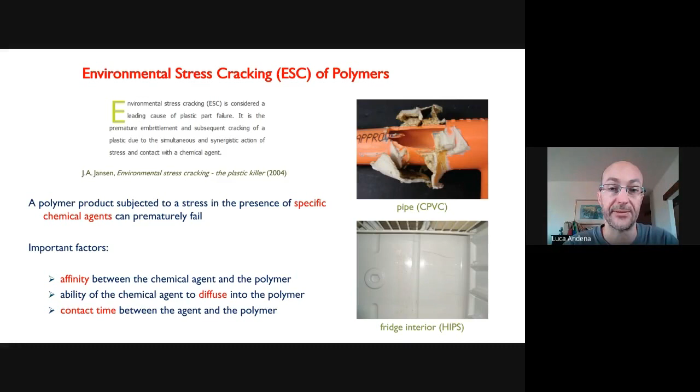The generally accepted mechanism to explain ESC is related to the typical way we conceive failures in polymers. Do you see the pointer, Bamba? Well, I don't know, hope so. Anyway... okay, that's good, so I can use it to point out things.

Typically, when we observe failure in polymeric materials, we observe the formation of a craze, which is the structure generating from an already present defect within the material. The craze starts to grow with the formation of some voids with this fibrillar structure in which the material is drawn from the bulk and the fibers are stretched unto the point in which they break.

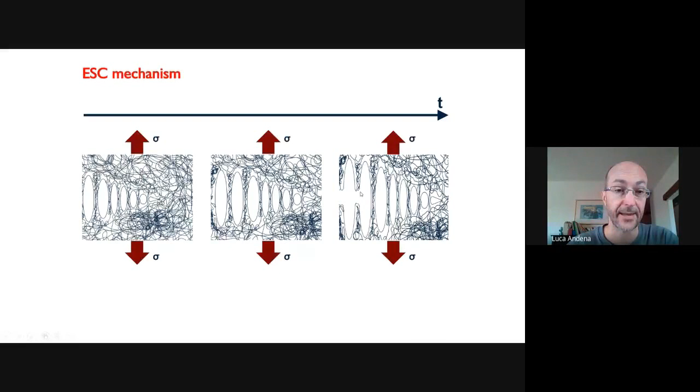In presence of the active environment, the environment can diffuse within the craze and locally cause a plasticization of the macromolecules of the material. This plasticization, which occurs because of the affinity between the agent and the material, basically makes it much easier for the fibers to deform and eventually break, thus reducing the mechanical strength of the material.

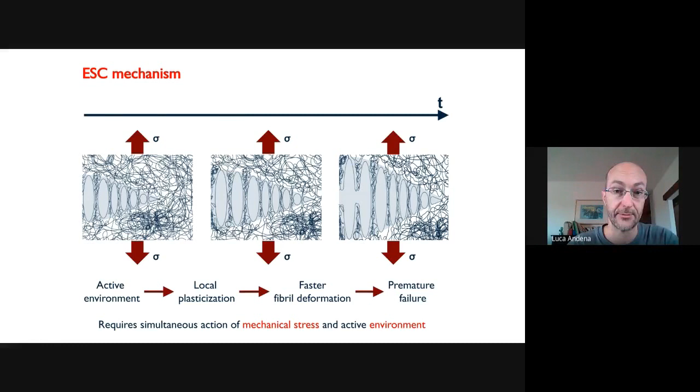The phenomenon has been studied extensively in the past 60 years, I'd say, or something like that. And the way it's described within the scientific community typically is related to a fracture mechanics approach, which is taken from the description of slow crack growth phenomena in general.

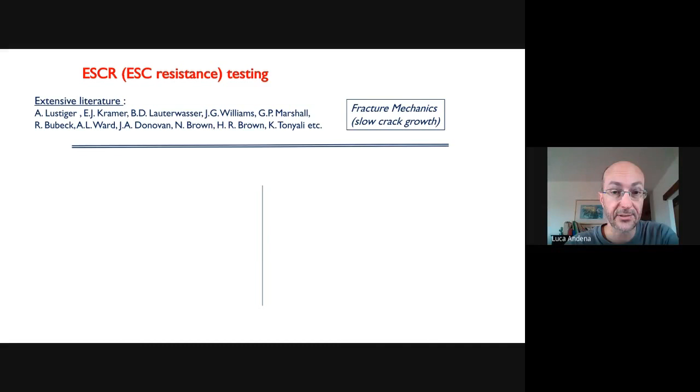However, before going into fracture mechanics, I'd like to discuss with you a couple of tests which are generally accepted as industrial standards to describe the phenomenon of ESC and to evaluate the resistance of materials to this kind of fracture. The first one is the bent strip method, which is generally used for rigid materials like amorphous polymers, like polystyrene seen before. The idea here is that I take a tensile sample and put it on a template with an applied deformation, and then it's immersed within the medium.

So you have the simultaneous presence of the mechanical stress due to bending and the environment, and then you test the sample and compare the strain of break with the value of the strain of break that you obtain on a sample which has not been immersed. Of course, the reduction in the strain of break will tell you how much the material is sensitive to ESC.

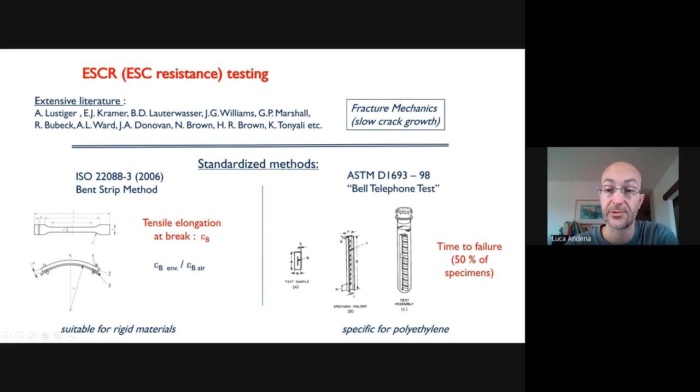Another method is the generally accepted gold standard for polyethylene and polyolefins in general. It was developed in the 1950s by Bell Labs, and the idea is, well, they were working on cable insulations. The idea is to cut small samples, put a notch in a sample, then bend it, put a stack of these samples in a vial containing the liquid, and then record the time required to obtain failure in 50% of the specimens.

There are a few issues with this kind of test. As you may notice, none of them is a proper fracture mechanics test. In the bent strip method, you don't have a notch, so the defect which originates fracture is not known a priori, it depends on the defects left there by the production process.

In the Bell telephone test, you have a notch, but the notch is put in the wrong way when you compare it with the existing bending stresses, which would be parallel to the notch direction. So the notch will cause the initiation of fracture, but then the fracture will proceed driven by stresses which are not the bending stresses and would change direction. In addition to that, the test is very geometry dependent, meaning that the bending stress that you achieve initially depends on the thickness of the samples and on the stiffness of the sample.

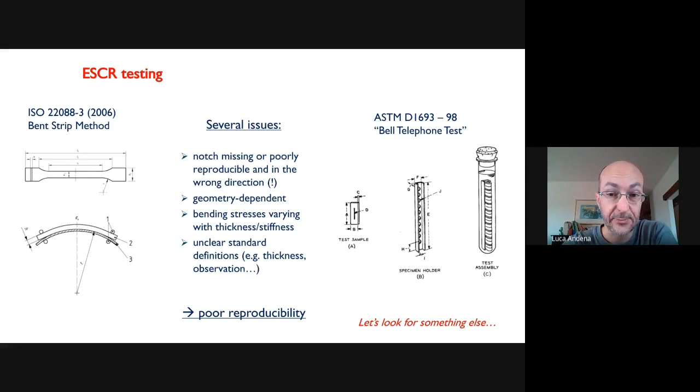There are some other unclear standard definitions, and in the end this all leads to poor reproducibility of the results you get with this test. This is why in the scientific community many people rely on alternative methods to characterize ESCR, and fracture mechanics is one of those.

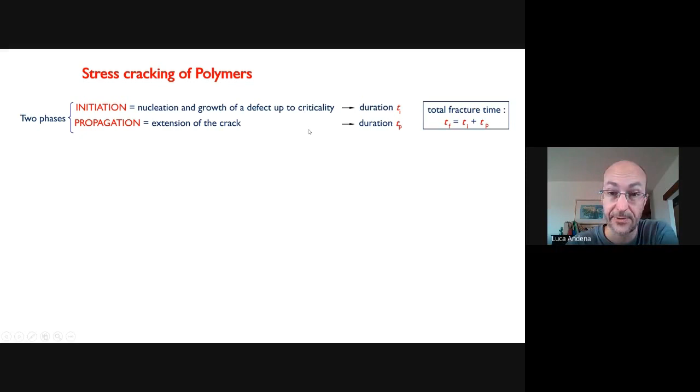The approach is identical to the approach taken to consider stress cracking of polymers in general. In polymers, which are viscoelastic materials, you assume there are two phases: initiation, which is the time required for the defect to become critical, and propagation, which is the time required for said defect to grow through the thickness of the product and cause failure.

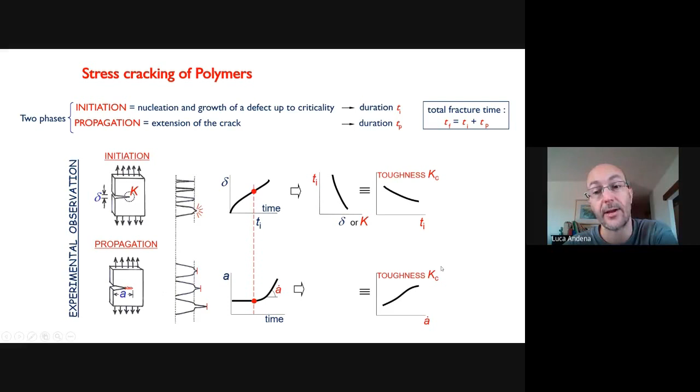At the same time, once you have propagation, you establish a relationship between the applied K and the speed at which the crack will grow within the material. This is some example of data.

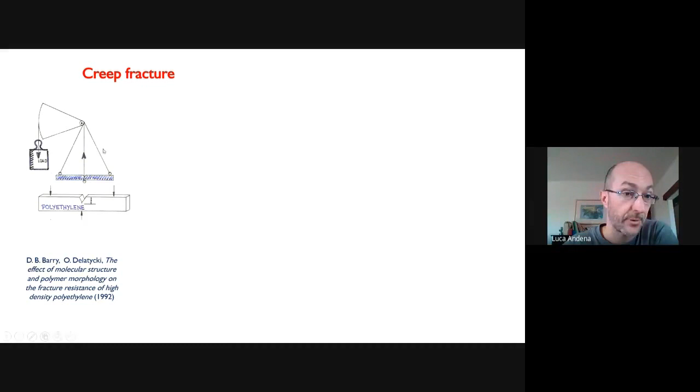Of course, the easiest loading case is one in which I apply a constant load—this situation, a bending stress which is notched. Here you can identify the pure creep region in which the deflection increases because of creep, and then the sudden increase you have when fracture initiation occurs.

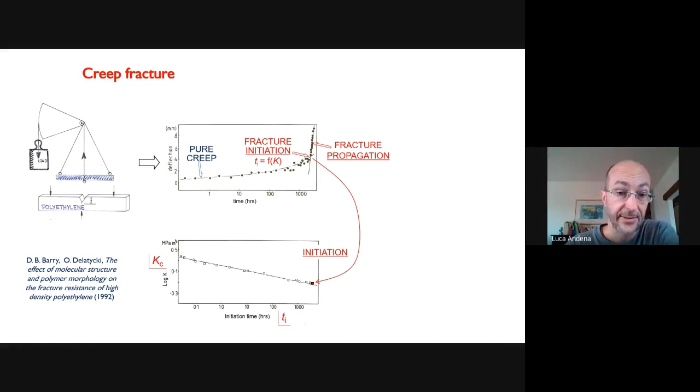So you typically obtain this kind of relationship, and it turns out that power laws can describe quite well the relationship between the existing parameters.

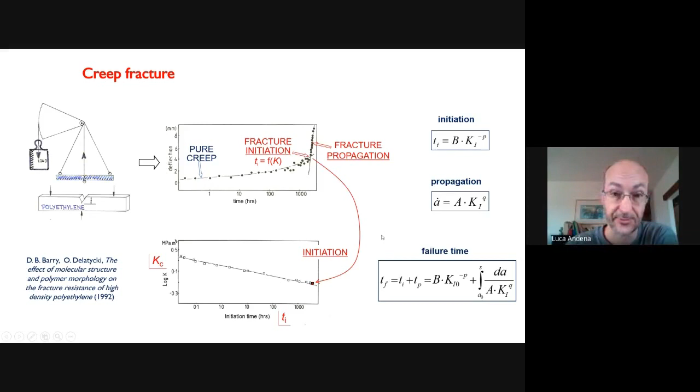An important aspect of this approach is that you can not just rank materials, but also make predictions on the lifetime of a given product once you know the initial defect size and the applied conditions in terms of K. Now, of course, you can also use this to study the effect of the environment, provided you have some way of adding the environment to your testing setup.

There are several options. For example, in Milan we sometimes use flexible bags—this preserves the original setup in terms of tools and fixtures that you use. Of course, the bag is filled with a medium of interest, or you can build a tank which hopefully fits your oven and testing machine, or you can build a custom rig.

We have custom rigs; Imperial College also has one, as does Versalis. These are just some examples taken from people working in the ESIS TC4 group on environmental stress cracking, which I'm involved in.

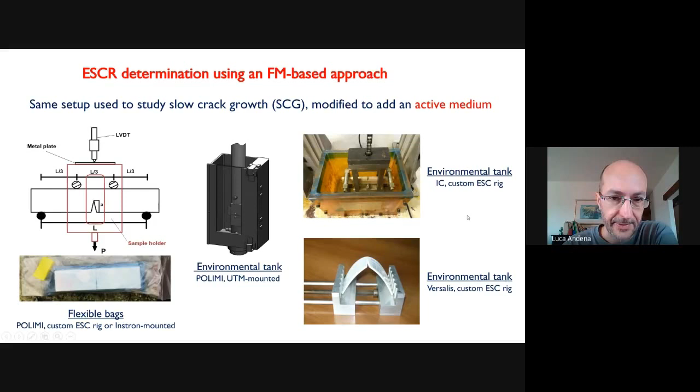Okay, this is a strange configuration—I'll tell more about that later on. The first point I'd like to address is that I mentioned a defect of these industrial standards is that they're geometry dependent. So the first thing is to assess whether the fracture mechanics approach can instead be geometry independent, and also to check the influence of the loading history.

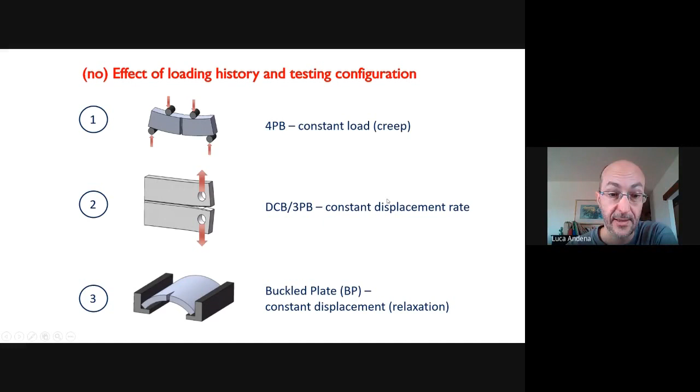I will present some results comparing three different loading configurations: 4-point bending under creep, DCB or 3-point bending under constant displacement rate as you'd do in a tensile experiment, or the buckled plate, which works in relaxation. In this particular work, two materials were selected, and it's interesting.

They were two HIPS materials with rubber particles to toughen the polystyrene. One was a conventional grade with slightly better mechanical properties. The other was a specifically tailored, environmentally resistant grade. Here the environment is sunflower seed oil—its properties are slightly worse in air, but it performs better in oil.

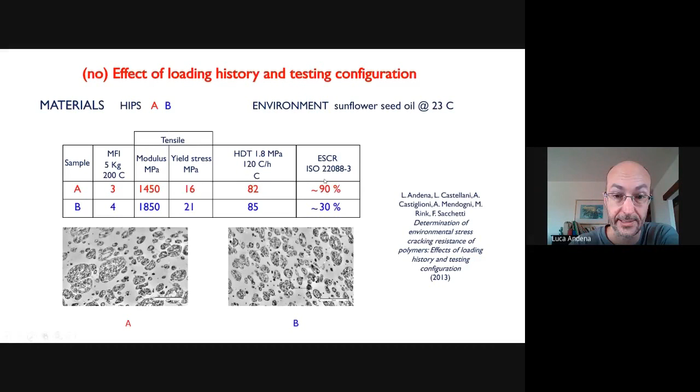There are different ways of measuring the parameters you need. With our setup using the creep tests, we use the compliance method to characterize the crack length—something you can do even when you cannot see the sample. The compliance depends on the creep compliance of the material and a function of the notch length, so by recording compliance you can know what the crack length is at any time, and detect initiation.

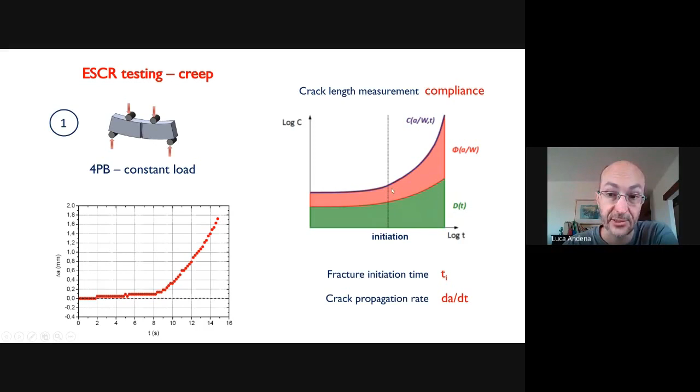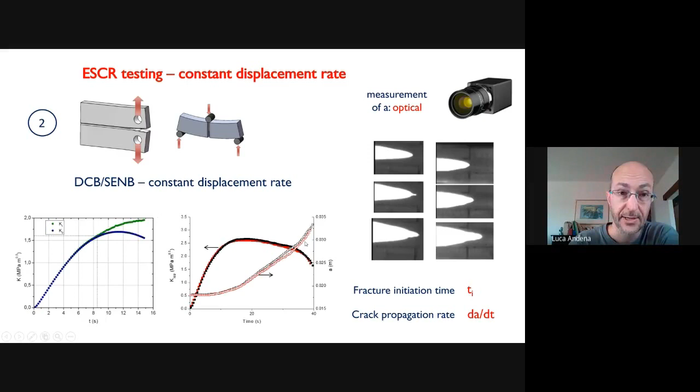Then you measure propagation. When you can see the sample, as in this case for the constant displacement rate test, you can use an optical method to record the crack advancement, so you get all the information you need. With a buckled plate configuration, this is a bit more peculiar.

Here you apply a constant bending to the plate, and you start with mode 1 conditions in which the crack driving force, given by this energy release rate term, only depends on the material modulus and the geometry.

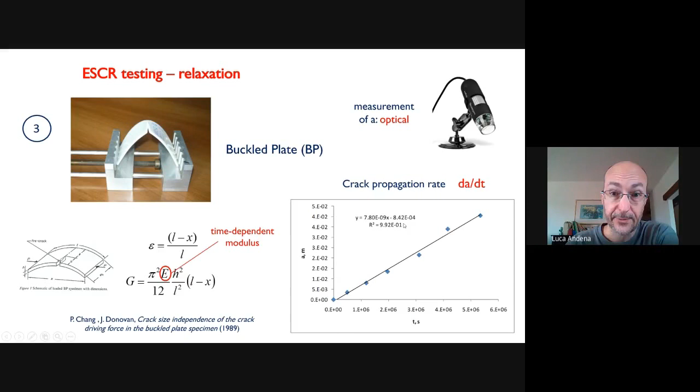It's constant in the first stages of the test, in which you expect also a constant crack propagation rate. It's hard to detect initiation here, but you can get propagation data. If you look at the results here, these are some examples. You can check some interesting facts.

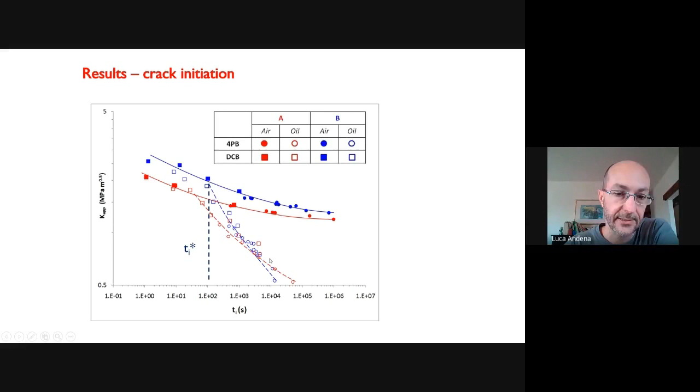Typical values, of course, are low here because you don't expect failure of products in a few hours. And you can identify a critical initiation time. If the load is too high, failure will occur before the medium has time to diffuse within the polymer and play a role. If you wait more, typically with lower K, the effect of the environment will be more and more important.

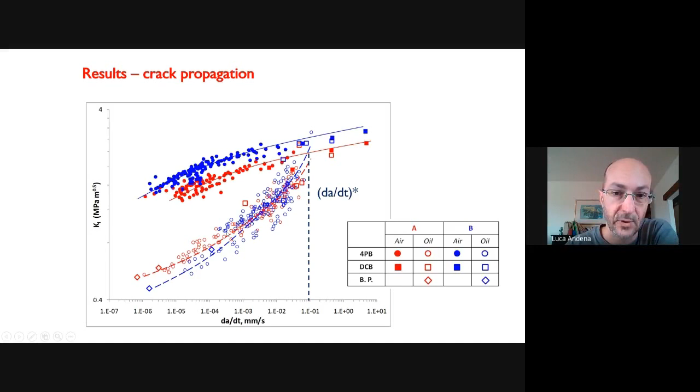In propagation, you see quite similar results with all the data. Of course, in propagation, you have more data points, but the trend is the same: the blue over the red, then the huge effect of the environment after a critical crack propagation speed, meaning low K values, and you have this inversion. So you expect the material which is ESC resistant to actually perform better for low values of K, which are typical in the applications.

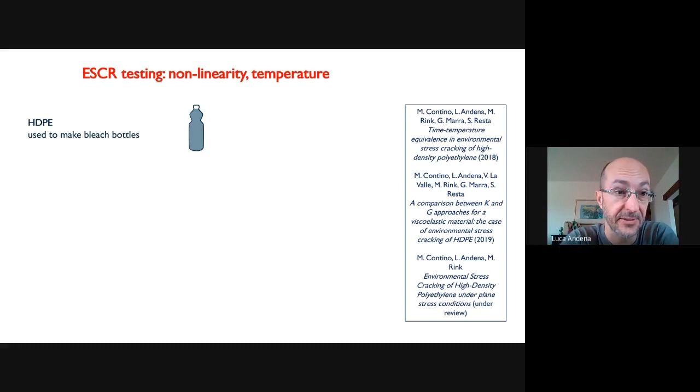So we can use fracture mechanics to characterize this kind of data. In the next few slides, I will present some aspects of ESC testing which are non-obvious. In particular, so far we followed the linear elastic fracture mechanics approach, which seems to work quite well with polystyrene. What about different materials like polyethylene, which is used to make bleach bottles?

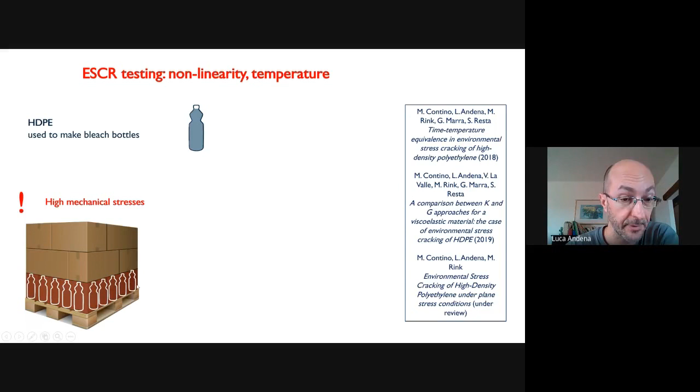The problem here is storage, and when the bottles at the bottom suffer from the load of the stacks stacked above. Here, the problem is not bleach itself. The material is chosen to be resistant, but commercial bleach includes surfactants, which are a well-known ESC agent for polyethylene.

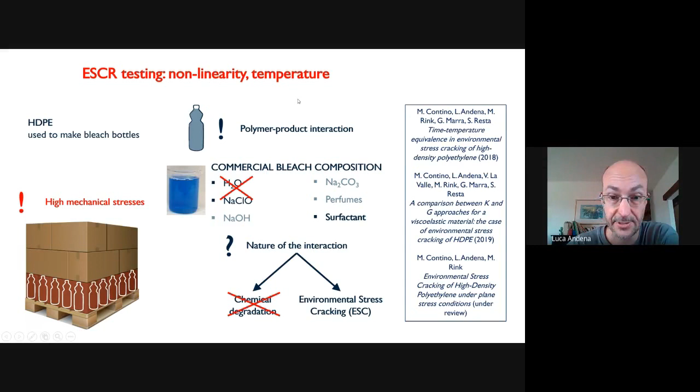Here, the effects that we will consider are nonlinearity and temperature. If you look at the data, the situation is similar to what we've seen before, with this relationship between the applied load and initiation time, and the effect of the environment.

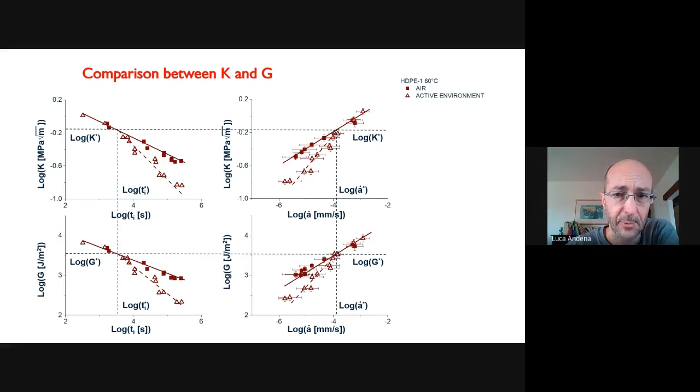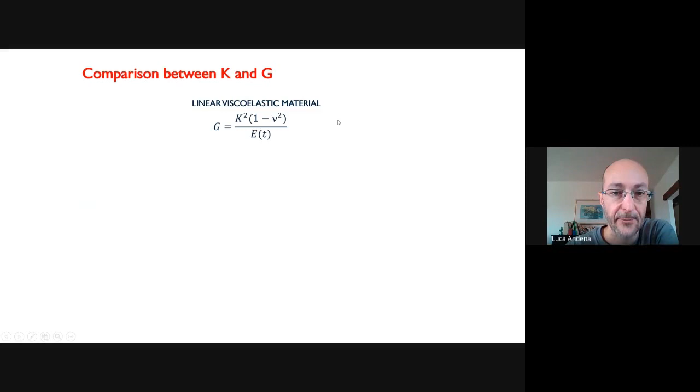You get the same characteristic times, and you get these values for the critical interaction parameters. However, the relationship between the two, well, uses a modulus as a way to get from G to K and vice versa. Of course, being a viscoelastic material, like many polymers, these moduli will be time dependent.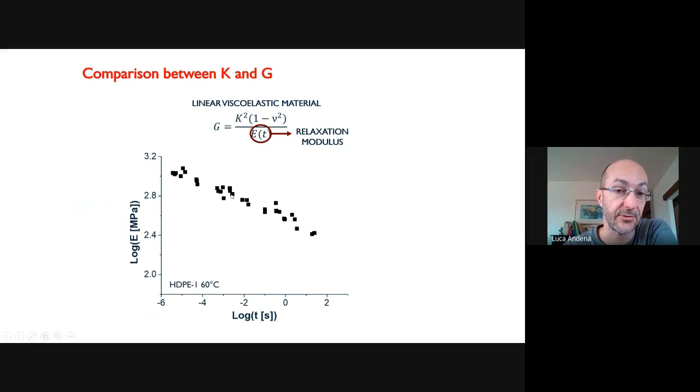You could say, okay, no worries, I will perform a relaxation experiment. You can do that and get a modulus as a function of time. The problem is that with many materials, these moduli will be strongly strain dependent because of the material nonlinearity.

So that you, for example, can see that even in a range in which you are only considering a few percent of strain, you have an order of magnitude variation on the moduli. So can we still try to make a comparison between G and K data?

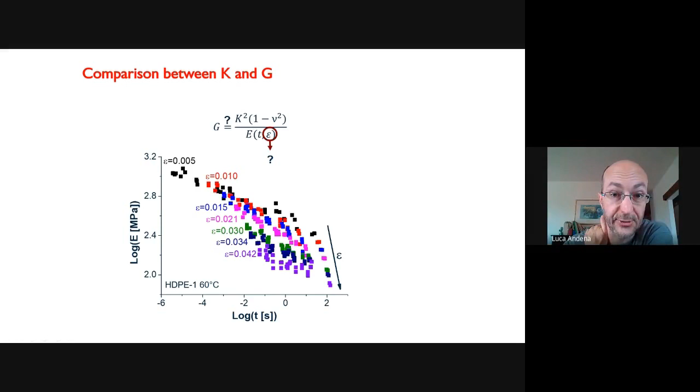Short answer is yes, provided we take strain correctly into account. To demonstrate that, I have a slide in which we basically took G data and K data and used them to determine an effective modulus, which is based on this equation.

And not only do all the data points fall on a single curve, but what you can also check is that the curve of modulus versus time that you obtain is related to the value of the strain that you would expect for a sample bent like the fracture samples you are testing. So the answer is yes, it works.

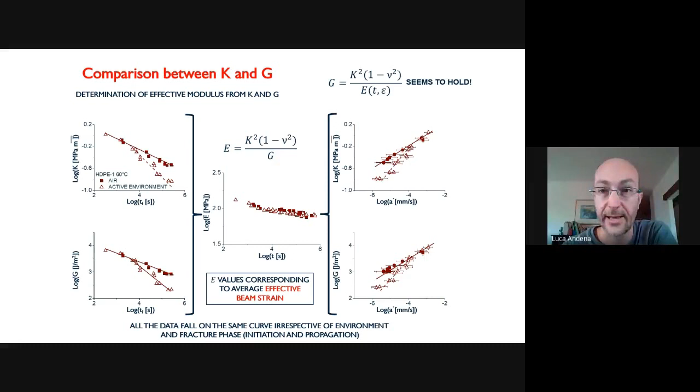You can use G or K as you wish, but be careful because these are viscoelastic materials, so it is important in your analysis to consider the correct value of strain and time. Another aspect which is interesting is the effect of temperature.

Temperature is used frequently in environmental stress cracking testing because tests can take quite a long time, so you typically use temperature to accelerate the tests. This works fine as long as the increase in temperature does not change the activity of the medium, of course. Up to 60 degrees, typically things are not severely affected.

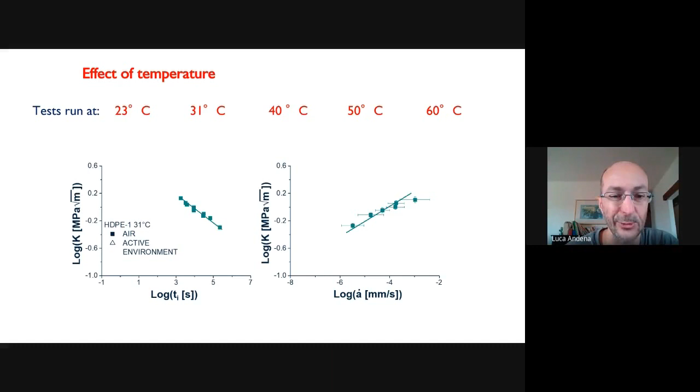I'd like to show some results on the polyethylene we've seen before, taken at different temperatures. These are the previous data. If you look at 50 degrees, you see a very similar trend, but as you decrease the temperature, the curves rise a little bit, as you would expect, because things slow down, so you need a higher K to get fracture in the same amount of time. Here's the curve at 23 degrees, in which you also see the brittle, the ductile failure region.

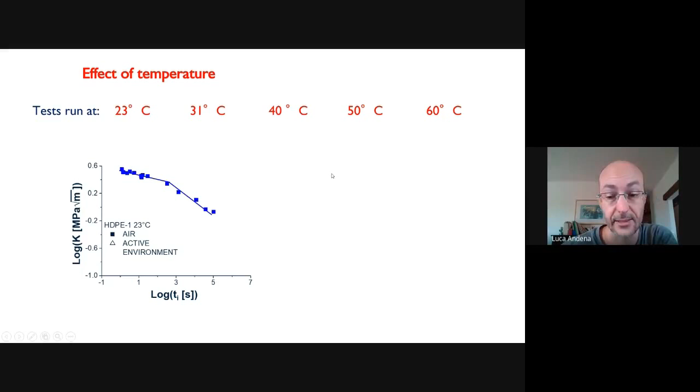It turns out that you can try to superimpose all the data together by applying time-temperature superposition, which is a well-known reduction scheme used to treat mechanical properties of polymers. Basically, it means you can shift curves at different temperatures to obtain a single master curve. And you can see that the shift factor, the amount you need to perform this translation, turns out nicely for all the conditions.

This is an important result because it says a few things about ESC. It means that, at least in this case, since the shift factor is the same in air and in the environment, the acceleration factor is only due to the material viscoelasticity and not to a change in the ESC process itself.

This is interesting because it means you are free to change the temperature as you wish to accelerate testing. But not only that, you can take data from tests performed at high temperature to rank different materials, for example at 60 degrees, and use that data to make predictions about the expected lifetime of products which work at 23 degrees or not much different, like bottles stored somewhere before being put on the shelves.

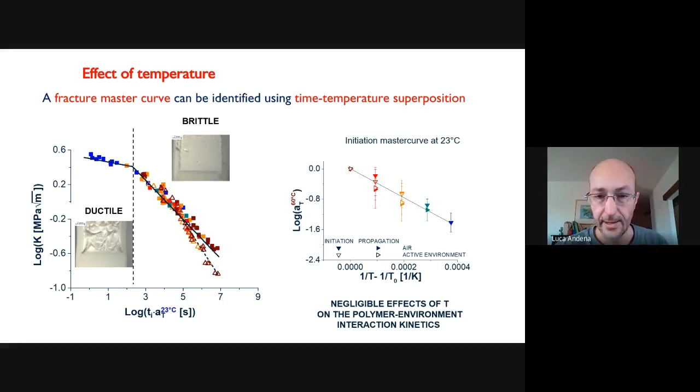Okay, now I will run a bit fast probably, but I think I had some time to talk about, to point out some conclusions.

I hope that with this short lecture I convinced you that environmental stress cracking can be a very important phenomenon, because it can really decrease the expected lifetime of some products by orders of magnitude. So it's very important to find out whether the polymeric material chosen in a given application can be affected by the environment. Of course, this doesn't mean that if the environment is in contact while the material is not loaded, anything happens — you have to keep in mind that only when you have the simultaneous presence of the environment and the mechanical loading can ESC occur.

So you can immerse the material in a given medium for 2 years, but if the medium goes away before you apply some mechanical load, nothing bad happens to the material. However, if you have the simultaneous presence, then you have to be very careful.

There are some standards to characterize the resistance to this phenomenon. However, they're a bit lacking in terms of accuracy and sensitivity, and they cannot be used to make predictions. So you can tell, okay, material A is probably better than material B, but I have no clue as to how long a product may last in those conditions.